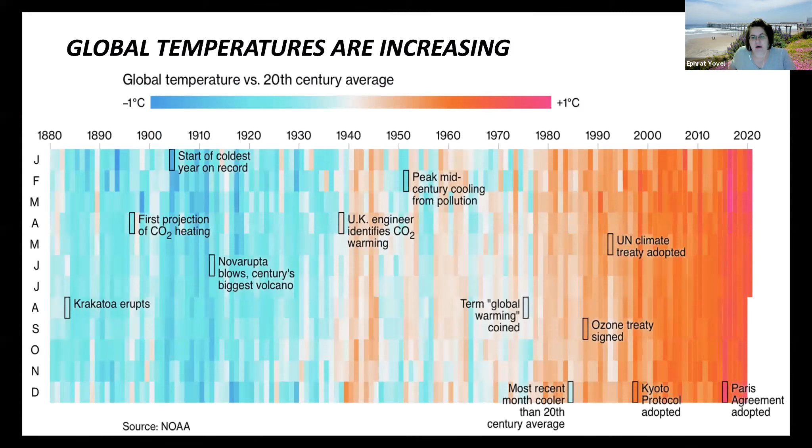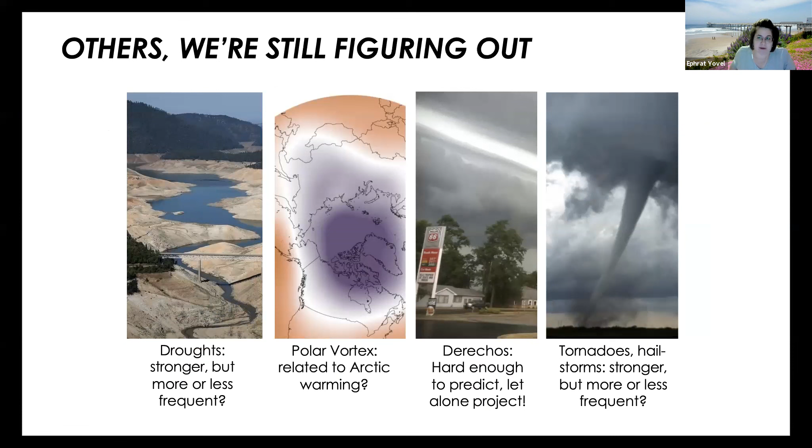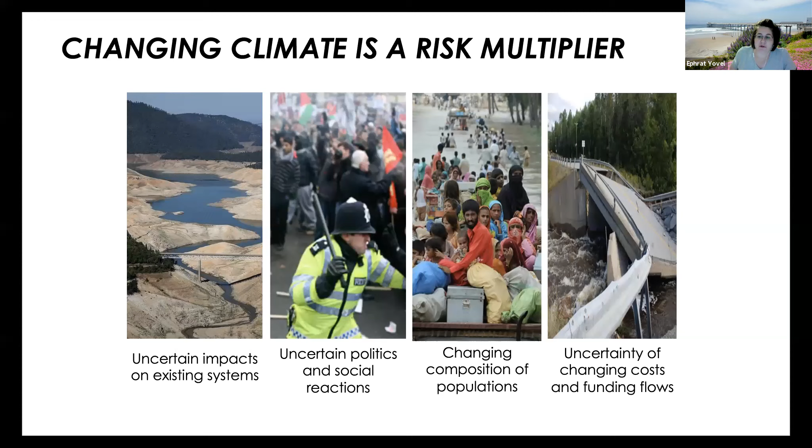So, hello again everybody. I want to speak about some aspects of infrastructure adaptation in general, not just transportation, because we will have quite a few speakers about transportation. I try to focus on those aspects that are shared across all public works sectors, including transportation. I'm not going to speak a lot about climate risk and vulnerability analysis, though I will mention them, of course, because they're an important tool in learning how to adapt. We had separate and multiple discussions about those, so I don't want to bore those people who have participated in previous more focused discussions.

Okay, I'll very quickly start with a few shared slides on the understanding of climate change. I don't know how many of you have participated in the previous discussion, so I apologize if there's a repetition.

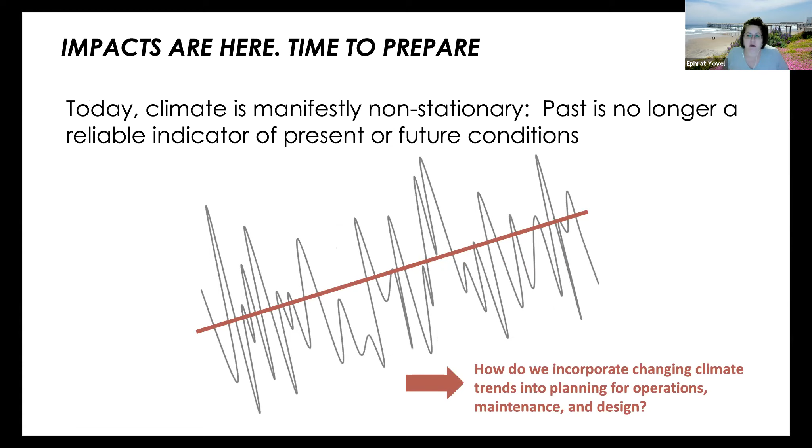So as you all know, we're living in a dramatically warming world. We have quite a few sets of climate impacts that, from a technical point, we're all comfortable and aware of the level and frequency and intensity of the impacts that are projected. There are quite a few climate extremes that are still being figured out or more refined. A better understanding is being developed. And of course, climate change is a tremendous risk multiplier from a social, natural resources, as well as funding aspect. The most important part to remember is that we cannot predict the future based on past events. The change is quite dramatic.

This slide, and probably these next two slides, are probably the most important ones for engineers - this understanding that we move from a stable historic trend to a non-stationary trend that is dramatically changed from what the past was.

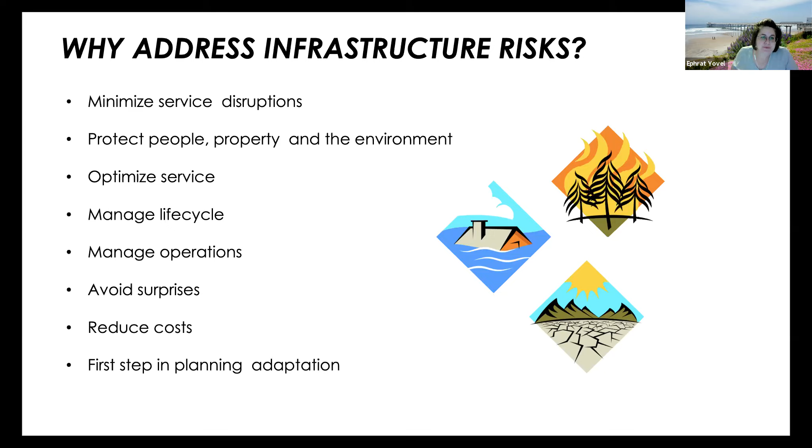The reason this is important is because many engineering professions rely on data parameter tables that set up standards and assessments, and they are relying on past information. The engineering profession in general develops infrastructure based on past experience, which sets the parameters. We're now moving into a very different world, which is a huge challenge. And lastly, we want to avoid the situation where we never have a green light to move forward and adapt and have a better future.

So, infrastructure and climate change. The range of services provided by infrastructure in general is tremendous: shelter, safety and security, aesthetics, heat, light and power, mobility, health and recreation, wealth creation, homes, buildings in general, transportation networks, energy networks, wastewater and stormwater networks, industrial structures, communications, landfills and waste-related structures, and of course culture and recreation. That's just to name a few.

We need to address risks to infrastructure, or climate-related risk, because we need to minimize service disruptions. That's one of the key aspects of services. We need to protect people as well as property. We need to optimize services to a changing climate. We need to better manage the life cycle of infrastructure assets that we build. We need to manage operations and hope to avoid surprises. Reducing costs is always a criteria for any agency that I'm aware of. And lastly, understanding the risks is a critical part of understanding adaptation planning.

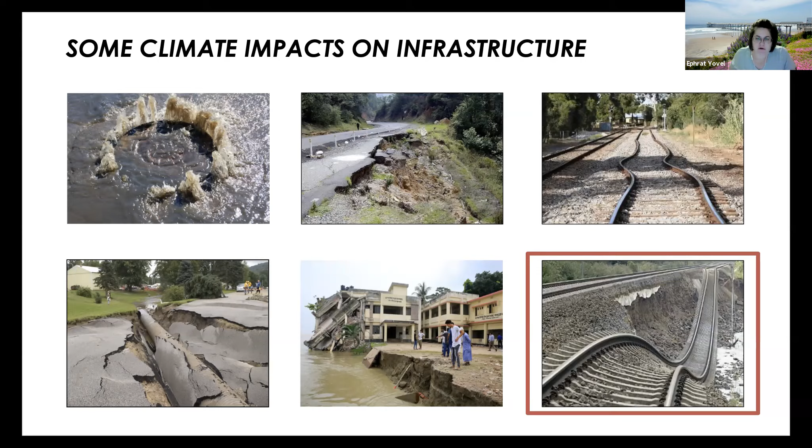Since Ukraine is considered a relatively cold country, I don't know how many of you are familiar with the concept of railway lines that get deformed from heat. This is something the UK has experienced, Canada has experienced, the northern parts of the US have experienced. Florida, for example, doesn't experience this because the standards there are already working towards very high heat levels. But in the northern US and Canada, where they have a lot more snow, and in Europe, in very snowy regions, you're starting to see deformation of railway lines, depending on when they were constructed and some of the standards.

The other thing you start seeing quite a lot, which is underappreciated, is collapsing of the substrate for railway design. This specific picture is from Canada, caused by the permafrost. The melting of the permafrost was affecting the structures, the foundations for structures, as well as roads and railways. Obviously permafrost itself is not an issue in Ukraine, but I do think the public works and transportation ministries need to start looking at the foundations of the infrastructure and how that is designed. That is also something really, really critical. You see that also obviously in the center with the pictures of the road collapse.

We're looking at bridges that are collapsing. We're looking at dams, drainage systems, all of which are changing due to a changing climate.

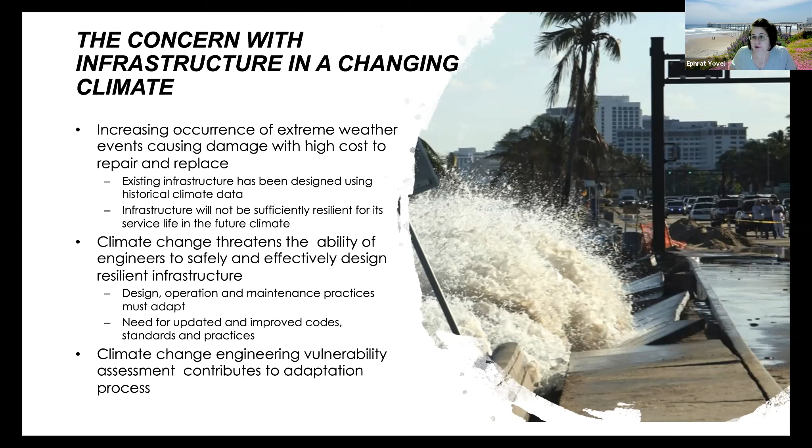Obviously, climate change threatens the ability to provide safe and effective infrastructure. If your facility, whether it's stormwater, drainage, roads, or structures, is not designed to accommodate a changing environment, then the facility itself is not as safe as it should be.

Climate change engineering vulnerability assessments, which we'll talk about in a bit more detail, but not much, is a really critical component of the design phase. It's also a very critical component of assessing risk and understanding some of the issues.

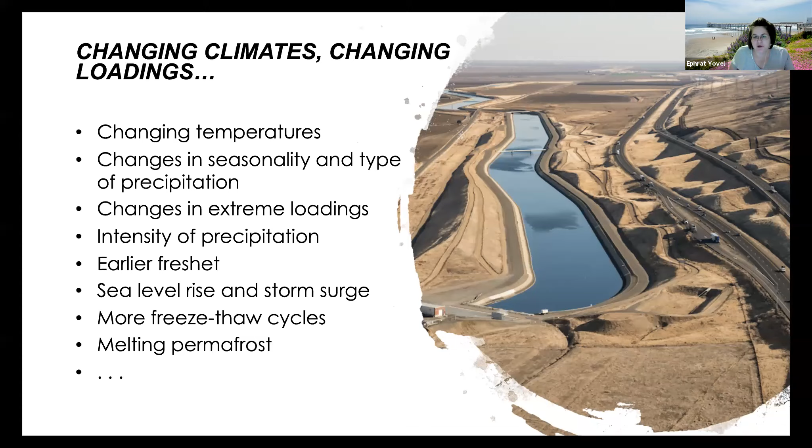For example, in South Florida, which experiences a lot of flooding now, municipalities cannot insure their service vehicles, whether it's waste trucks, ambulances, or police cars, because there are so many occurrences of flooding that insurance companies are claiming the cities have not prepared enough and have not rebuilt enough. They cannot insure a lot of their smaller assets, the vehicles, which means that in reality, the cost to replace them is actually much higher than projected in budgets and in municipal operating budgets, maintenance and operations.

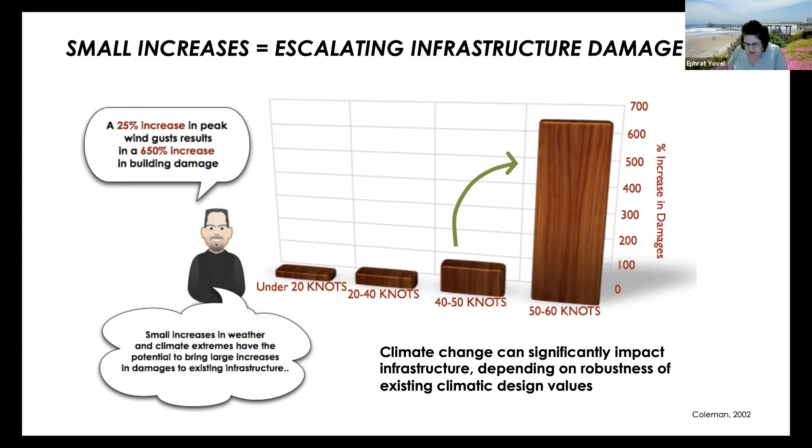One of the reasons climate is such a critical aspect for infrastructure in general is that it changes the load on the network, on the individual assets. And there's such a wide variety of challenges that the climate poses to the parameters we design with, that it really requires a strategic and consistent approach to changing things.

So, for example, if this is for wind - what we see in a lot of climate events and climate impacts is that once you reach a certain threshold, the impacts increase dramatically. This is for wind, from a survey of insurance costs for wind payments across the world, and you see that once you hit the 50 knot threshold, all of a sudden damages increase by 650%. So a 25% increase in wind strength is causing a 650% increase in damages.

So those thresholds are different for wind, different for water, different for heat. And we're seeing that what we would consider from an engineering perspective a small jump, from 50 knots to 60 knots, is not that big of a jump really. But in terms of damages, because it exceeds the capacities and loads of the design infrastructure, all of a sudden we're seeing tremendous jumps in damages.

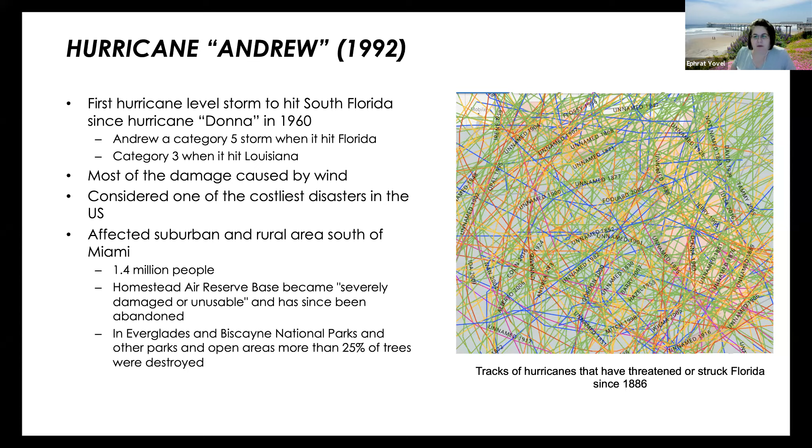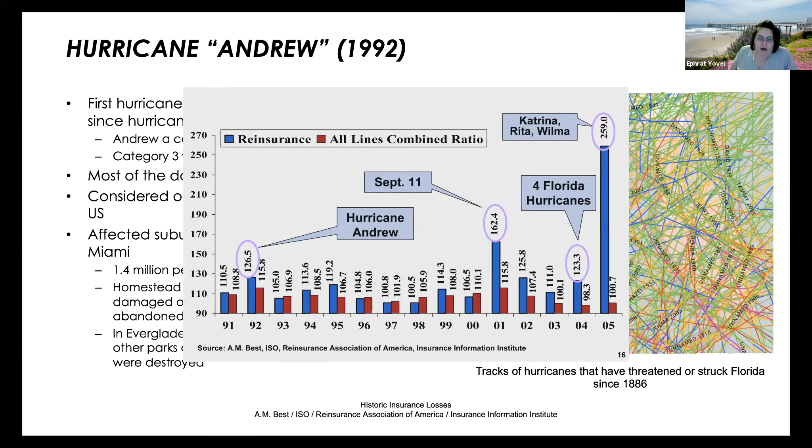For example, if the population of a city grows very fast, the infrastructure is not going to keep up. There are going to be a couple of years where roads are extremely busy, or the sewer system is a bit overloaded. What that does, by having this gap between the design capacity and the actual load, is actually cause failure of the assets - not the system, but the individual assets.

So small changes and understanding these thresholds are really, really important. On the other hand, I want to show an example where small changes can also make a very big difference in how assets respond. So I'll give you an example, also from Florida.

I don't know how many of you are familiar with hurricanes, but Florida experiences a lot of hurricanes. Hurricanes have 20 or 30-year cycles, where you have 20 or 25 years of very low exposure, and then 20 or 30 years of very high exposure, or at least that's been the historic trend. So Hurricane Andrew in 1992 hit Florida and was literally the first storm to hit Florida after a huge gap - a 30-year gap in hurricanes.

During that period, the population of Florida grew from 4 or 5 million to something like 12 or 15 million. So it created a huge amount of damage, which I'm not going to go into - I could talk about that for a good couple of hours. But at that time, in 1992, it was considered the most expensive disaster the US had experienced.

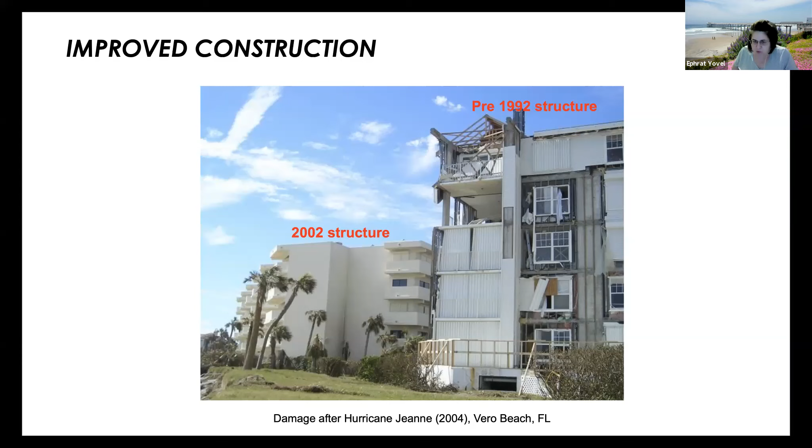One of the things Andrew did, because it came after 30 years of not experiencing hurricanes, is it actually generated quite a lot of changes to how construction and building is approached in Florida. It improved land use planning, restricted development in certain areas, and increased requirements for open space. The Florida building code is now updated every 5 years to adjust for climate impacts and new technology.

Every 5 years, we go through a review of the building standards for every single public asset and structure. Building costs in Florida are at least 15% higher than any other state, but there are improved construction techniques and quite a lot of non-structural mitigation aspects. The reason I want to show you this list is because even though these were implemented for disaster reasons, they could all be considered adaptation of various sectors to a natural disaster and to changing climate.

One of the things they did is change the design code, the engineering requirements. We have here an experience from a hurricane, damage from a hurricane after 2004. In 2004, there were 4 very strong hurricanes that hit within a 3-week period, so there was quite a lot of damage to structures.

You can see in the foreground a structure built before 1992, and a structure built in 2002, where the difference in the damage is quite significant. When you think about it, what was actually the difference is they changed 2 things in the roofing: the toe nailing, which is a type of connection for the nails, and the metal anchors which connect the trusses to the beams.

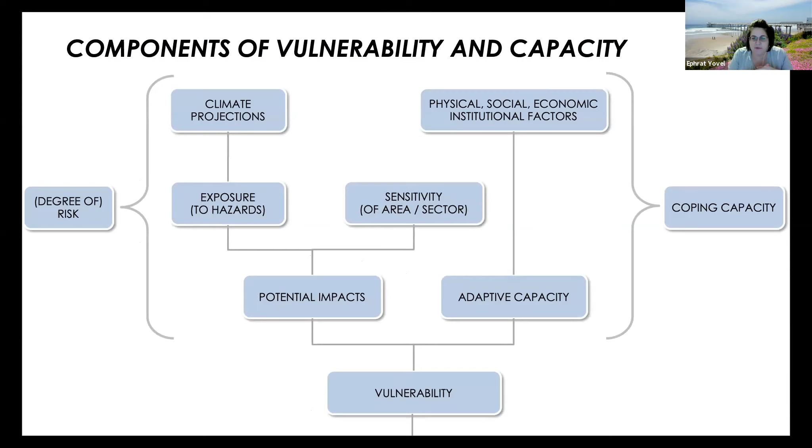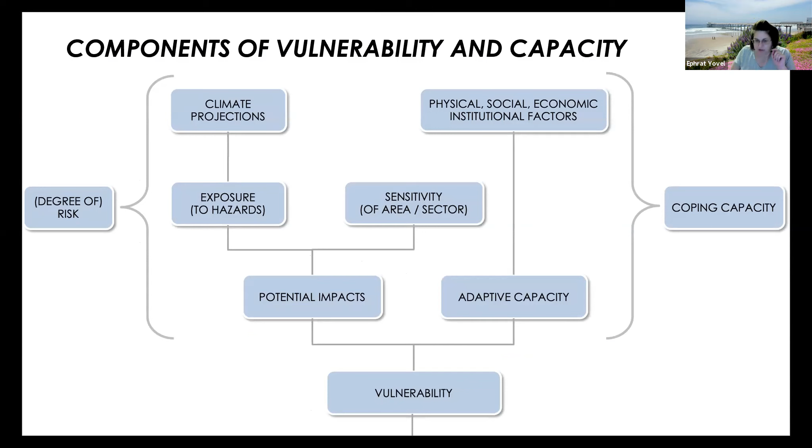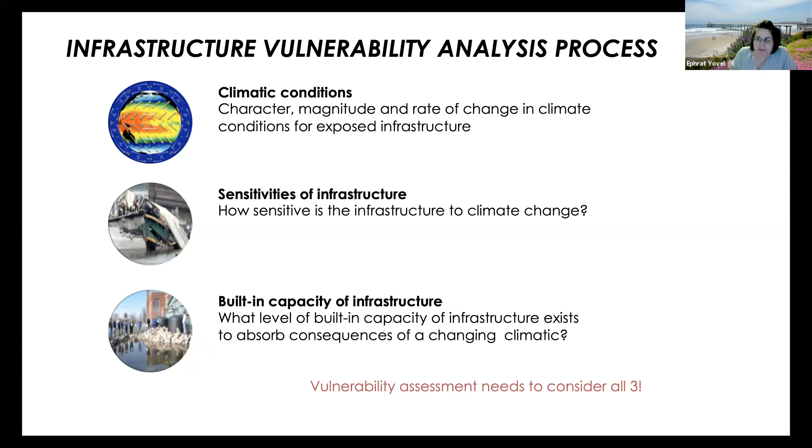So while yes, there's tremendous damage that can be caused when we cross climate thresholds and get these huge jumps in impacts, we can also make a lot of changes through better understanding of the risks facing structures, assets, and systems, and how to reduce them. Because we have a better understanding of the risks and vulnerabilities, we can be very targeted in our approach. Changing the types of nails you use for a roof is not a big cost for a builder, but it's a tremendous savings and reduction in vulnerability for the structure, as well as for the people who use it.

Infrastructure vulnerability analysis, just like every other type of vulnerability analysis, relies on understanding exposure, sensitivity, and adaptive capacity. The additional aspect that really needs to be considered is the technical parameters, because any asset has a set of technical parameters that define its capacities. So when dealing with asset vulnerability analysis, whether it's a structure, a road, a wastewater facility, or anything considered public works or structures, you also need to consider the technical parameters of that individual asset.

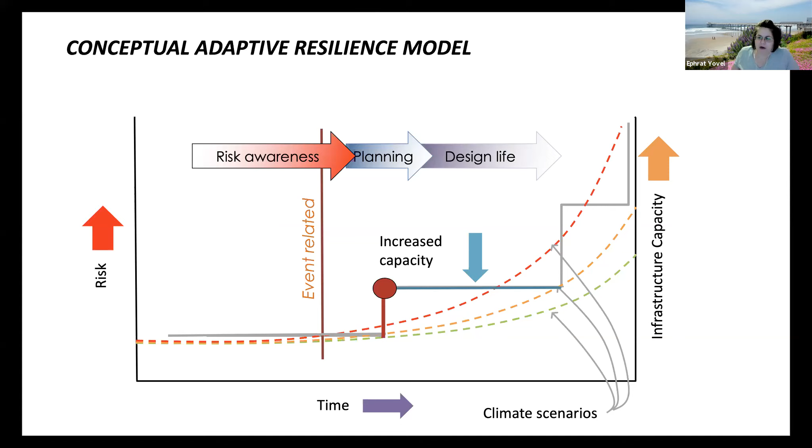Oh, it's okay. We hear you. You're keeping up with me. Okay, good.

So basically, we need to start thinking more about system resilience and asset resilience, which is the ability to withstand a much wider variety of climate impacts. From a technical point of view, this means that we need to have a wider set of design parameters that any asset is working for.

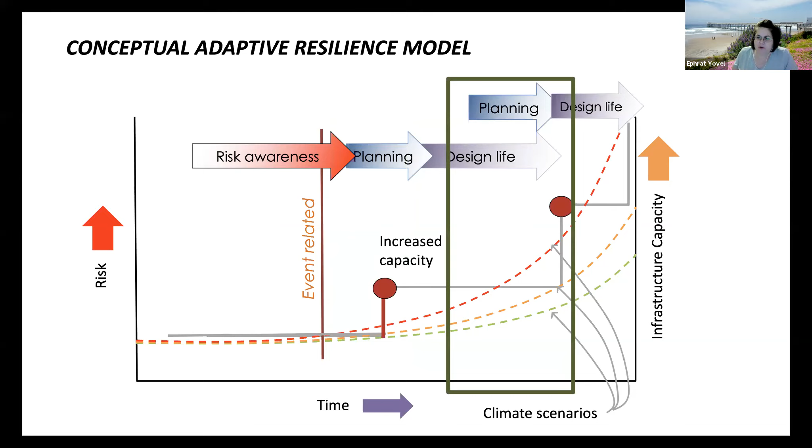Why is this important? If we think of a matrix of risk and infrastructure capacity and time in a context of some climate scenarios, some good, some worse, we start with where the blue line reflects where we stand with our current infrastructure.

As soon as we have a risk event, there's an increased awareness of potential risks in an asset. But it takes time to adjust the asset, not only in terms of planning, but also construction, because all public works assets have a very long planning and design life compared to some smaller adaptations. So what we see is big jumps in increased capacity before we stabilize at a new level of capacity.

And we repeat these cycles for all infrastructure assets. So basically that means we need to understand that transition from understanding the risk to incorporating that into the planning period of all infrastructure assets.

That's a very intensive awareness and technical understanding that has to jump up very quickly in order to be included in future plans. And then we also need to understand this transition towards the end of the life of an asset, of how quickly the new parameters need to be integrated, verified and validated so that we don't face collapse of structures.

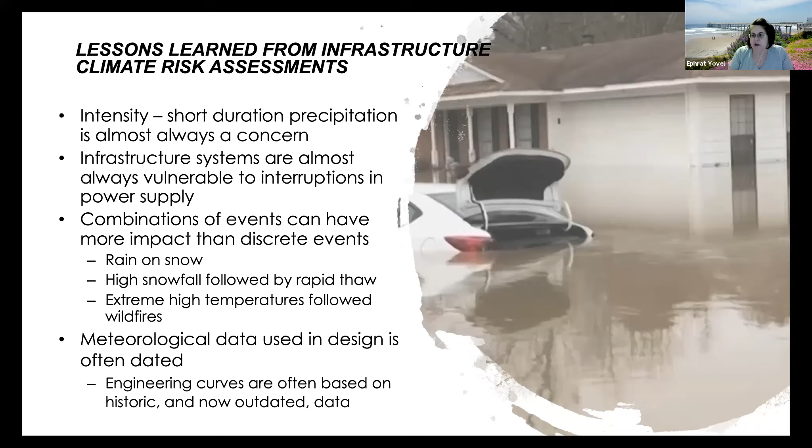I would say about 90% of infrastructure assets are vulnerable to gaps in the power system because of energy outages. That is a huge issue, especially as we rely more on optimized networks to balance the network, to optimize use and to monitor what is going on.

Combinations of events tend to have more severe impacts than individual events. And most importantly, the engineering curves that we use for design are severely outdated around the world. This is probably the biggest gap that exists around the world in terms of adapting quickly.

As I said in the beginning, engineers rely on these curves to design, and very few engineers are willing to develop a new set of curves without peer review and without looking at what is happening around the world. There's a lot of differences between different countries.

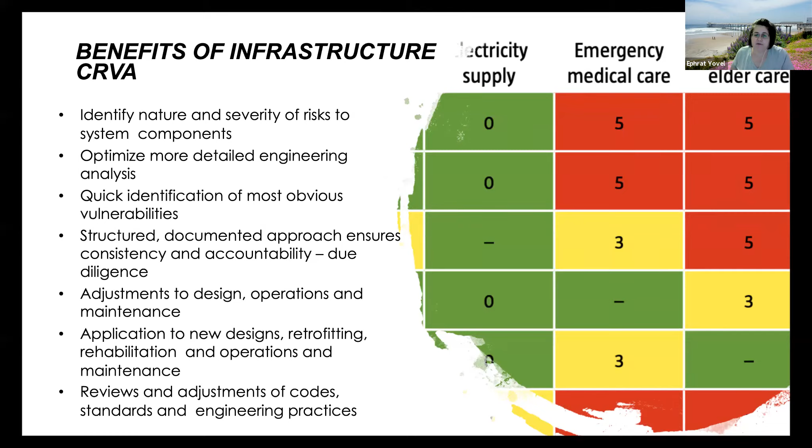For example, the US has two sets, one for the southern US and one for the northern US, because of the differences in temperatures. But Europe has one set. So even though on asphalt, for example, Germany goes up to 50 degrees, the European code actually doesn't go up to 50 degrees. So if you're using the European code as opposed to the German code, how do you balance that, and how risk averse are you?

We should be pushing our engineers in their original design thinking to go up to higher extremes, because in the end that is cheaper and more cost effective than having to fix things further down the road.

Multidisciplinary teams, I don't think we need to talk about, but that's really critical. Engineers tend to have very siloed understanding, and having wider teams working in the design phase saves a lot of time. Obviously, for climate projections, you need to have good data.

You need to make sure your baseline data is accurate, and monitoring and maintaining it. You'd be surprised at how many systems are not really good at monitoring and maintaining not only weather events, but also the impacts on infrastructure. So asset management becomes really critical.

The key aspects here are climate risk vulnerability analysis, identifying the nature, optimizing design, quick identification of vulnerabilities, a very structured approach to how you do the analysis, adjustments to the design, planning, and operations, application of new designs, and adjustment of codes and standards.

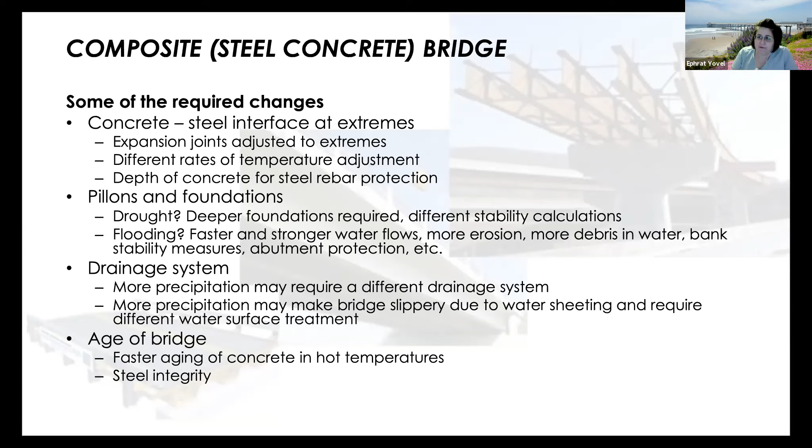They were built to the highest extreme of SNiP. And I said, that's great, except for the last 5 years you have already experienced temperatures and rainfall exceeding the design parameters, the very extreme parameters of SNiP that was designed in 1960 or 1970. That doesn't mean SNiP doesn't have an extreme weather section - it does, except it was never used in bridge design.

So all those old structures need to be looked at. We had this very long discussion about this. Now, Ukraine obviously doesn't have the terrain that Georgia has, but that doesn't mean you don't have bridges. So all I'm saying is basically, we have a lot more weak points in a lot of infrastructure than we realize, number one.

Number two, the solutions to a lot of these issues are known. If you sit down any engineer and say we are going to have twice as much rain on the bridge that needs to be drained off, that's not a difficult solution. Technically, it's a very easy solution. The difficult part is getting the engineer to accept that transition to a higher range of water flow or higher range of temperatures. The technical capacity, the technical design options are very easy. They're there. They're known for a very long time. The difficult part is getting the engineers to start using them in structure design and to start thinking of a more systemic approach to these things.

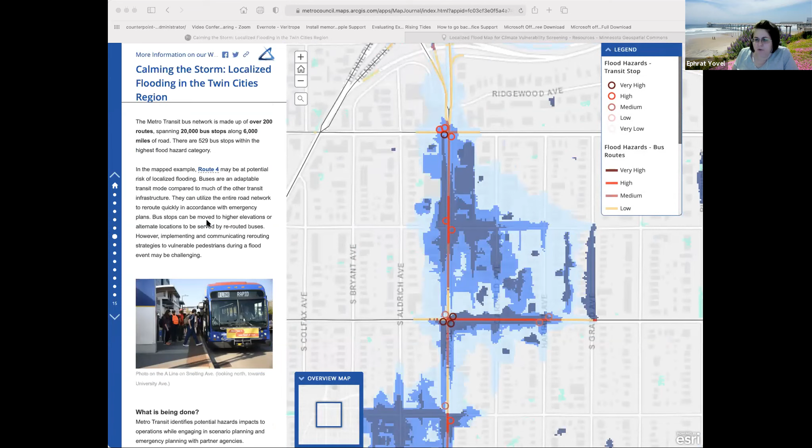I want to show you, if you'll allow me, some of the interdependencies we're talking about and why this is so important. So if you recall, from a couple of sessions ago, we talked about the vulnerability analysis that I'd done in Minnesota. I'm not going to bore you with that.

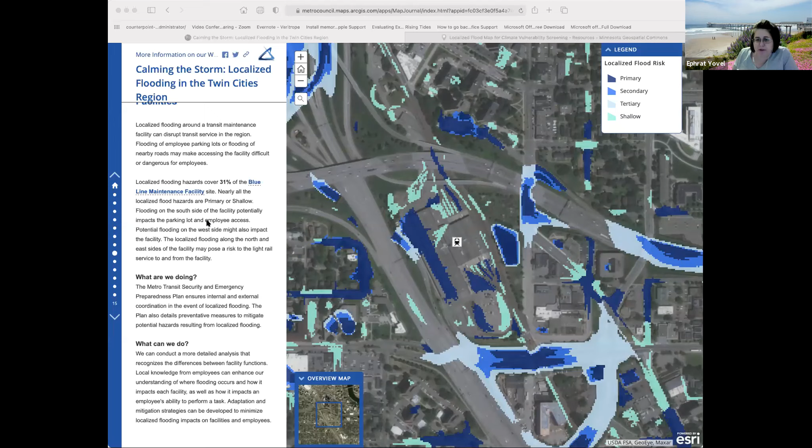So after we did the vulnerability assessment, we mapped this out for the whole city, not just the neighborhoods. And we looked at that in the context of a series of assets. This is for flooding. We don't need to go into the details right now, but just to show you, if we're looking at highways and transport, by having this online, all the agencies can see the data, right? They have better access than we have here in the story map. But you can see...

Here we see the exact segments of the highway that are at risk, so that the transportation, the highway division can actually look at which areas flood more frequently and are at higher risk, and can start adjusting their budgets and maintenance schedules to adjust for that. But also they can start adjusting for planning for replacements going forward.

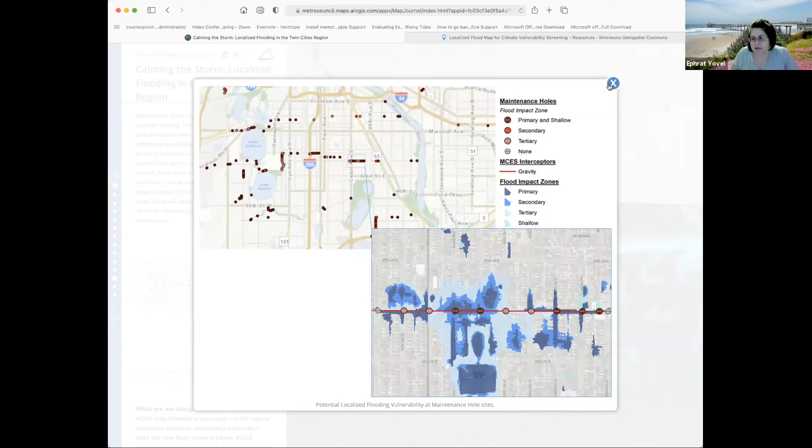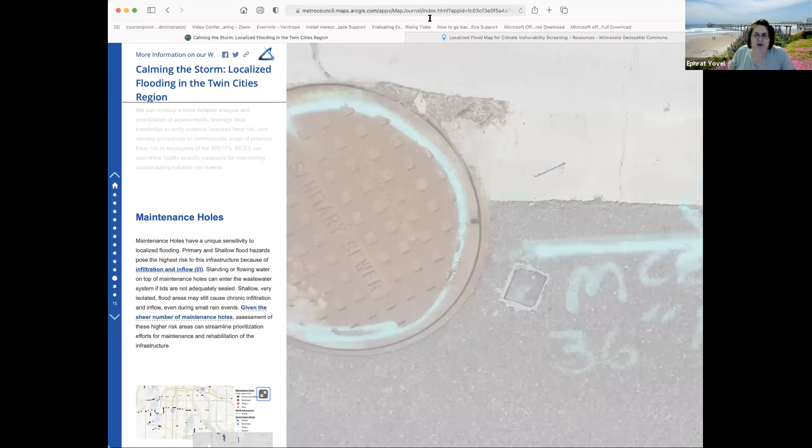We did this also for transit, the commuter transit stations and commuter transit spots, the bus transit areas, which ones are at risk and which ones aren't, the facilities, including the maintenance facilities, because if we don't have access to the depots to fix areas, we won't be able to. Wastewater treatment plants, which ones, and the access points.

Access is a pet peeve of mine. I think insufficient attention is paid to access to facilities, and they tend to get isolated. We see this a lot with hospitals especially. And I mentioned this briefly in our session on healthcare. Maintaining access to the facility is probably one of the highest priorities you have, because if you can't maintain access to the facility, you're never going to be able to fix the problems once there's an event.

Hospitals tend not to be considered priority access areas in the transportation design systems, for flooding events and access in general, even in heat events. And that needs to be looked at a lot more seriously as to how you maintain a high level of access to critical facilities.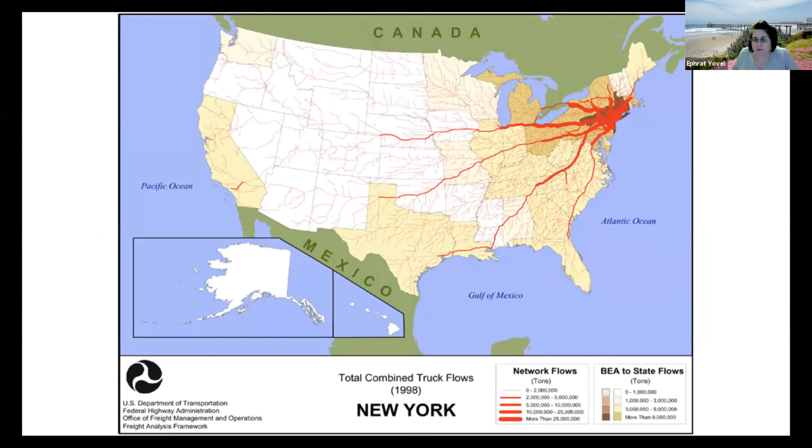Maintenance holes, we did an assessment of just about every single maintenance hole and which ones are flooding and which ones are not, so that we can adjust the maintenance schedules for the city here of Minneapolis.

Okay, this goes into some of the other mitigation measures, but I wanted to show you this because you can see how one good vulnerability assessment that is done correctly can help you address a lot of the interdependencies that exist between assets, even some that don't seem to be very obvious or very critical at the immediate point. And that's sort of me getting off my high horse of vulnerability assessments right now. But...

The point I'm really trying to make is the need to think both nationally for the system context, but also locally, to have a much better understanding of the context that the system operates in, for all systems. So I want to give you another example.

If you were asked today, most people who don't know the US and were asked which would be the most important port in the country for delivery of incoming goods, most people would say New York. Some would say Los Angeles. Very few would say Texas. And virtually no one would say Louisiana or New Orleans.

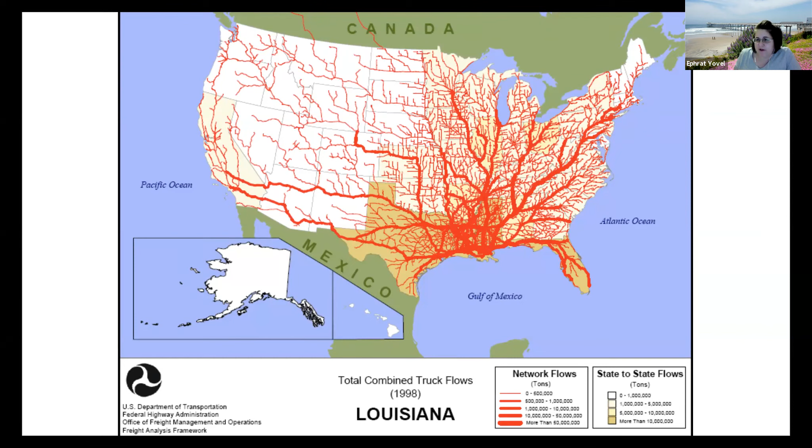Well, this is not quite New Orleans, this is between New Orleans and Biloxi. This is the reason Katrina was so expensive, because once Katrina hit, the damage to New Orleans itself comparatively was not much. That's not to detract from the damage there, but the social damage was much bigger than the structural damage, comparatively speaking. The damage to the economic system in the US, because of the dependency on New Orleans as an incoming port for transportation of goods and fuel...

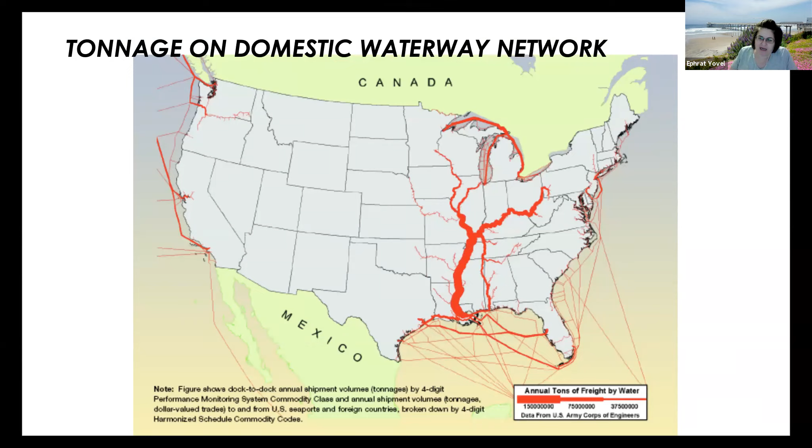was the reason the economy suffered so badly after Katrina. The fact that the US Army Corps of Engineers, responsible for the levees, drainage and water systems, did not understand the high level of dependence of the national economy on New Orleans as a port prior to Katrina, meant they didn't prioritize work needed there compared to other cities prioritized for other reasons. That's something all prioritization processes need to take into account—not only immediate local impacts, but also wider national and regional impacts.

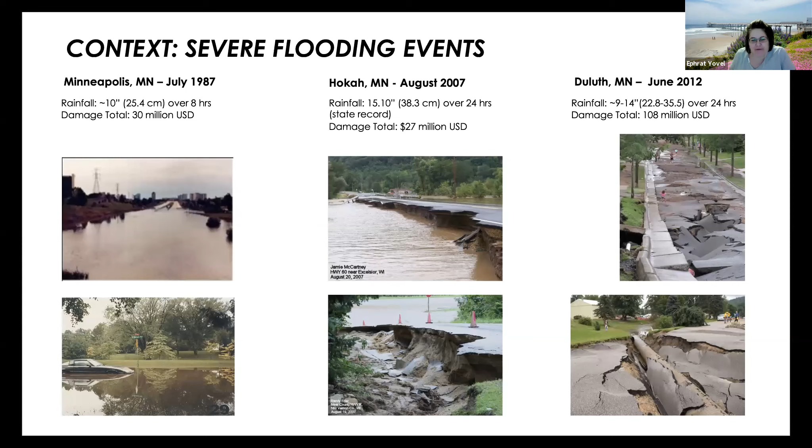If we look at combined truck flows, meaning not just fuel but also trucks, you see how important Louisiana was prior to 2005 to the transportation and delivery network in the US. It was also the primary center for delivery by waterways. So once the rivers flooded because of the hurricane, you couldn't use the waterway system to transport goods either, not just the roads but also the waterways. I just wanted to bring this up to show how critical it is to understand where your real vulnerability is, and where your weak points are. Adaptation is about understanding where your weak points are and fixing them so the system can retain its service capacity.

I want to go into a couple of case studies now. This is the assessment we did, which I mentioned earlier.

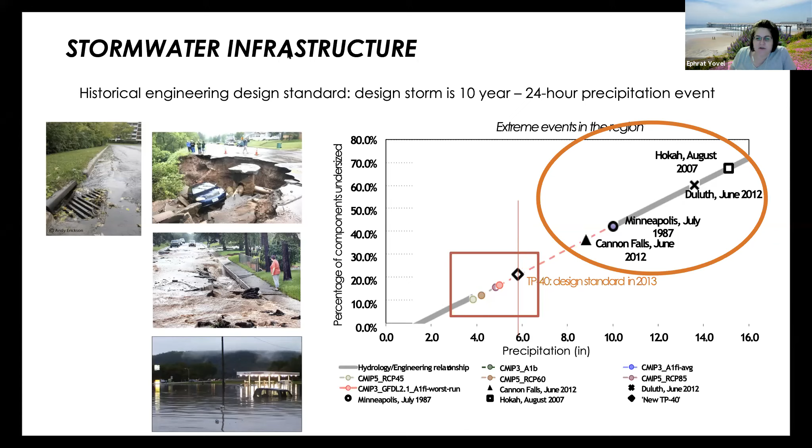How many people on the webinar have already seen this? Can you give me a quick number so I don't repeat it if everybody's seen this? I think we have new participants, so anyhow, we'd like to go over this once more.

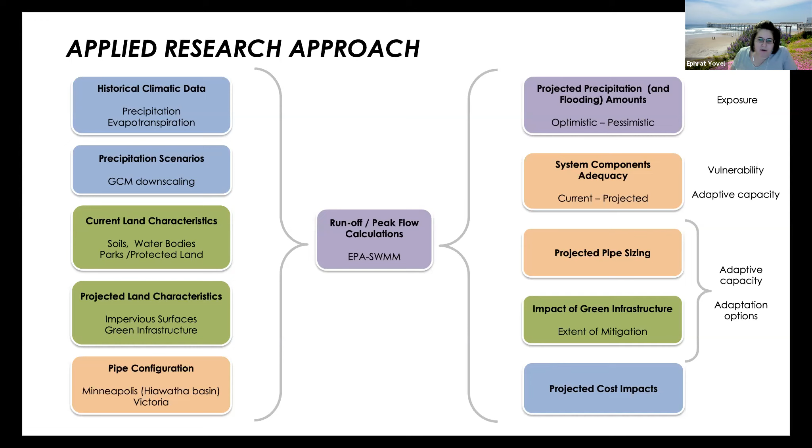So, we started with an assessment of vulnerability of the stormwater system. Minnesota had experienced quite a few flooding events that caused a lot of damage. Minnesota is in an area facing a significant increase in the amount of water and precipitation it's going to see. The watershed itself, this area of Minnesota, is called the 10,000 lakes—it has a lot of small lakes and ponds, so it's obviously very flat.

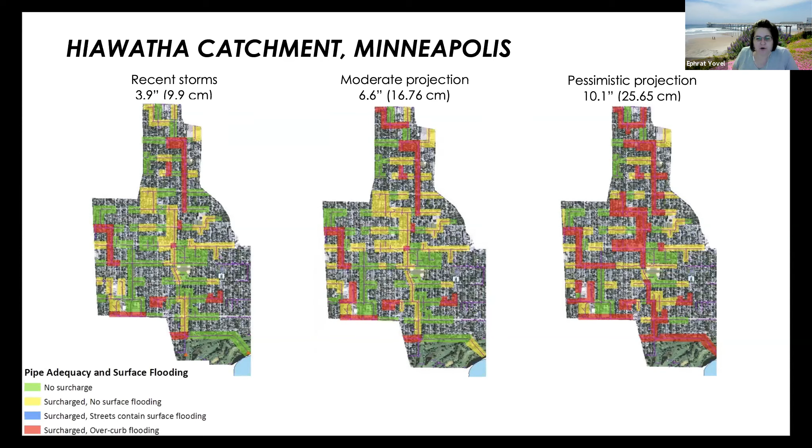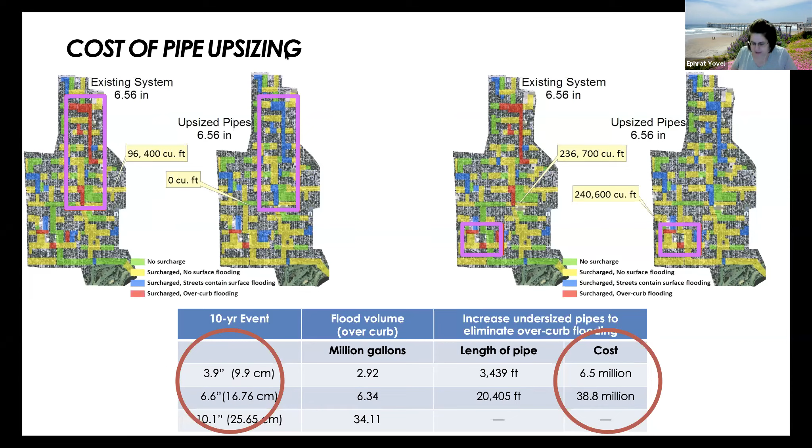So we built a vulnerability model based on EPA SWMM as well as climate projections, and identified what the new design storm capacities need to be. At the best level, we had to increase the system capacity by 10%. At the most pessimistic level, we had to increase it by 157%.

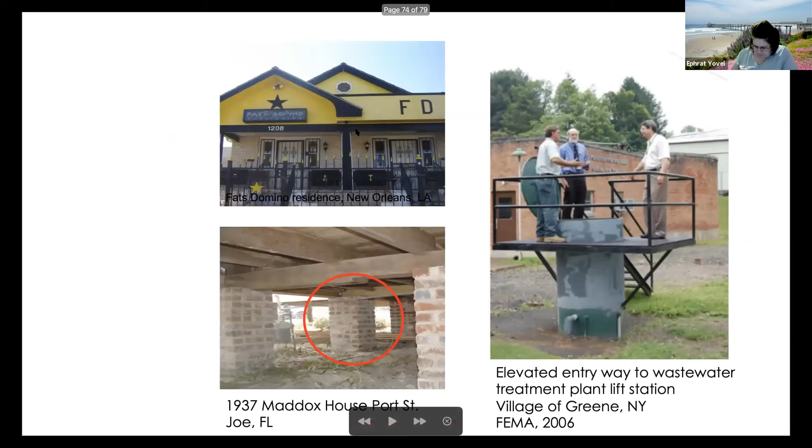Then we ran the models on the drainage system, and you can see there are quite significant parts with a lot of surcharge. Not only is the drainage insufficient, it overfloods and goes above the sidewalk curbs. What you see is a significant jump, even though if you look on the left-hand side here, we're not really jumping by a lot in terms of the amount of precipitation—only 3 additional inches, which is not a huge amount.

But the cost jumps quite significantly—we went from almost 7 million to almost 40 million. That's a huge jump in cost that literally panicked the municipal leaders here, because they were like, we're not going to be able to afford it, we're going to have to raise taxes, we're not going to get the money to do this—how do we fix this?

Well, one of the things the team pointed out to them was that they were looking at the wrong number. The number is not the cost or the length of pipe that needs to be replaced. The number is... sorry, oops.

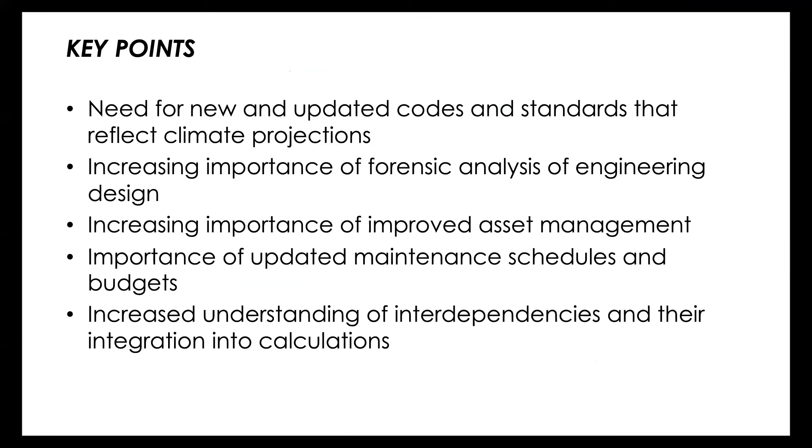Now, I don't know what your maintenance budgets look like in Ukraine, but I know that in every single country I've ever worked in, nobody has done 100% of the maintenance they're supposed to do in a single year. So the less maintenance you do, the more your gap grows. That means every 3% increase, you're never catching up. You'll never be able to address the changing climate because you've never caught up with historic maintenance. And if your systems are not maintained properly, they're never going to perform at 100% capacity.

So every year you don't do your maintenance budgets properly, and you skip maintenance for whatever reason, it means you're reducing that much capacity from your system already, and then you add climate impacts on top of that. That means you're reducing your capacity by that much more, and this is why systems start collapsing. We need to start addressing that much more concretely in budgets.

And lastly, understanding the interdependencies between systems, and the importance of making sure road transport to healthcare facilities stays at 100%, that wastewater systems and every single system is optimized. We all need to understand that a power outage will not only cause a power outage, but it could also cause a problem with a sewage plant, with streetlights, and God knows what else, right? Having every sector understand the interdependencies much better will help adjust the system on how we move forward.

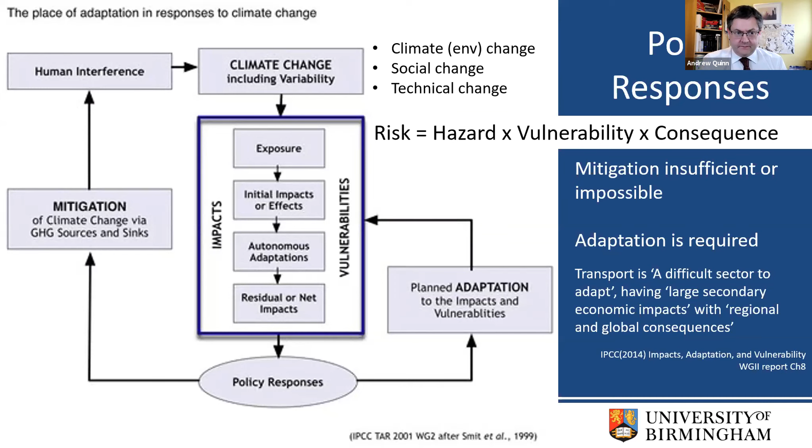So it's important to think about how we deal with adaptation in these kinds of situations. This is a figure taken from the IPCC report, the Intergovernmental Panel on Climate Change, and it highlights the difference between mitigation, the reduction of greenhouse gas emissions, and adaptation, particularly of engineering structures, infrastructure, and transport, where we need to change structures and systems to make them resilient to the changing climate. We can only mitigate, only reduce the changes to a certain degree. We also have to adapt. These two elements must go hand in hand.

Transport has been identified many times as a particularly difficult sector to adapt. It has very large economic impacts, and regional and global consequences because of supply chains and the increasing length and complexity of the things we have to transport.

So it's important that we consider adaptation, and the various elements of risk that we are trying to change when doing adaptation. In my risk equation, I think about the hazard, which is the changing climate and the meteorological variables concerned, the vulnerability of the structures and elements in place for the transport system, and also the consequences of any failure of the transport system.

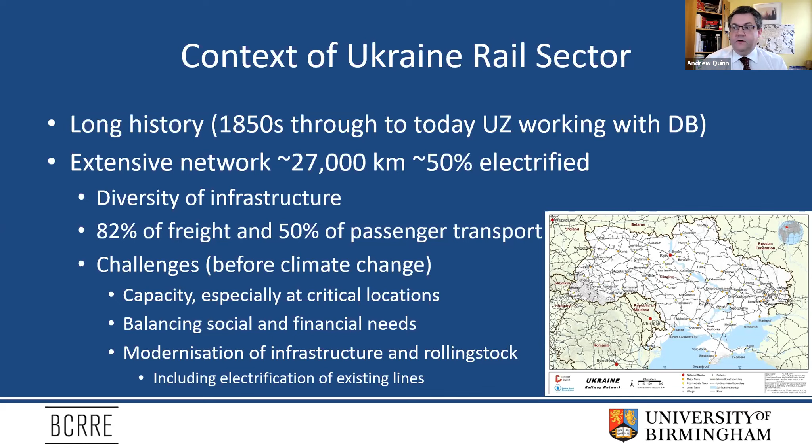It's really important to start thinking about this in the context of the Ukrainian railway sector. Ukrainian railways, just like UK railways and many others around the world, have a very long history. It dates back to the early days of railways in the 1850s and has been continually changing throughout history. Even now, it's beginning to work with DB, the German rail group, to try and develop its practices and infrastructure. So it's a continuous changing process, but a lot of the infrastructure underlying the transport system has been there for a very long time.

So we have this mixture of old and new. It's a very extensive network, 22, 25, 27 thousand kilometers of track, depending on exactly how you measure it. And as one of the previous speakers mentioned, around half of that has been electrified to date. So we have this very important infrastructure, very embedded within the communities it serves. And it has a number of challenges before we even start to think about climate change: capacity issues, the need to develop a financial model supporting both social and economic sustainability of the network, and challenges of infrastructure and rolling stock modernization.

So we need to put all of these changes into the model in order to be able to cope with climate change at the same time as dealing with all of these different infrastructure challenges.

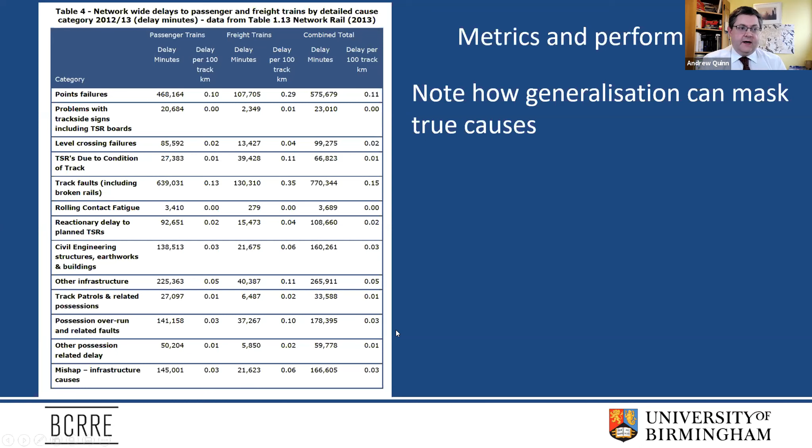So these are all alternative approaches to resilience which we need to consider in our planning. And they can make a difference to the level of service that we are able to provide on the railway network in the event of disruption.

So we built guidebooks for different sectors of transport, including the rail network, looking at different types of extreme weather. So that is available for you to look at.

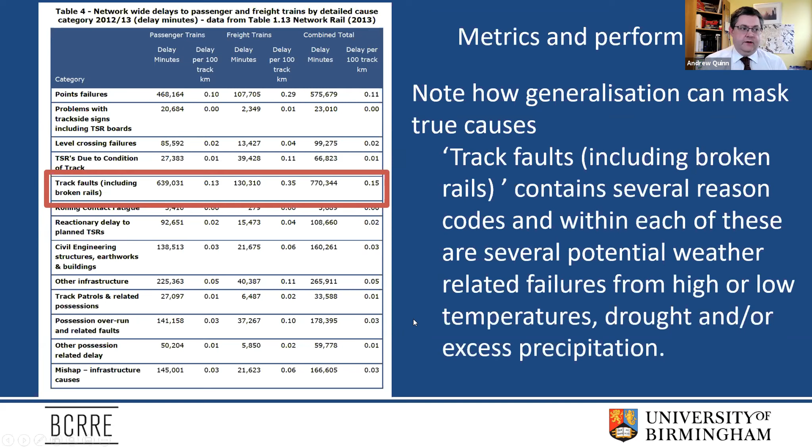And we also conduct studies looking at the data from the railway and correlating things like faults on the railway with the weather conditions that were happening at the time. And you can begin to see a pattern where particular types of faults with particular types of equipment are very dependent on particular weather conditions.

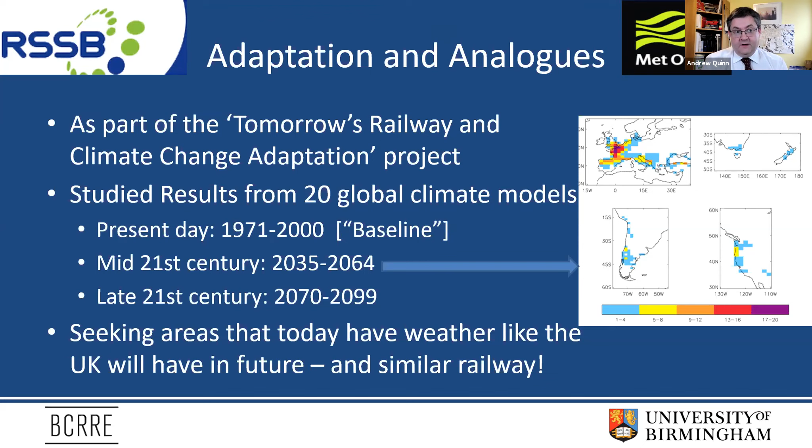That begins to give you an early warning of what may be in store when the climate changes, so you can see if you're more likely to have high temperatures, and therefore more likely to have certain sorts of equipment failing. You can then put in place a plan to improve the specification of that equipment when it's replaced, or develop some protective approach to avoid its failure from high temperatures.

It's important to have good data, as the previous speaker mentioned, and I'd echo that. In some cases, railway data can be very general. Track faults are one type of failure, but that type of failure can occur for a number of different reasons, depending on different weather variables. So it's important to have depth of data to understand the different causes of a particular failure. That's something we are working on with the Network Rail in the UK.

This slide is an example of work we have done to identify what we call analogues - other places around the world that have similar weather to what we might expect in the UK in the future, so we can begin to look at how they are coping with their current conditions. In that way, we begin to get people to work together, which is a very important part of adaptation planning.

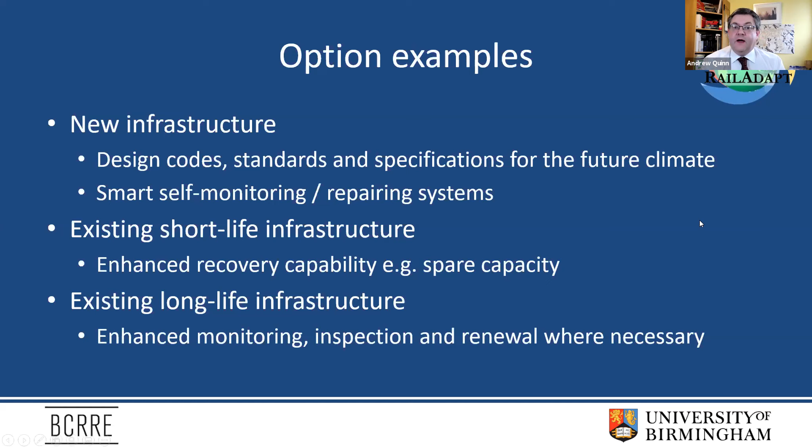Then it can put that into an adaptation plan, which can generate options for improving resilience in different places by different methods. It can put those plans into action and review the outcomes, such that the next round of planning can be informed by what has already happened. All of these steps within this plan link to other organizations and sources of information, so it's important this is a collaborative effort through European programs, local expertise, and all the different sources of knowledge available.

Some of the kinds of options one can be thinking about relate to new infrastructure and improving design codes and specifications for the future. It can also involve monitoring systems which give early warning of problems and failures, and utilize the rail network's ability to do management and maintenance by improving capacity and recovery times for equipment and infrastructure failures.

And finally, for very long life infrastructure, we can put in place monitoring which gives us good information about the condition of the infrastructure, highlighting weaknesses where interventions are necessary, and helping plan renewals of the railway system.

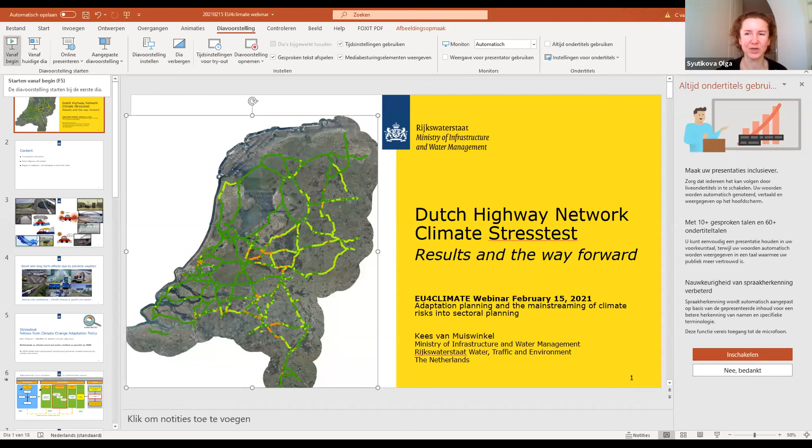Thank you Andrew very much. I had also some questions about your presentation, but maybe I would put them aside until the end of the discussion, because they're very deep questions about the indicators of failure and our possibility to put them together and analyze everything, so we may need more instructions on this point. Will you stay with us? Yes, I will. Okay, so we'll have more questions at the end of the discussion.

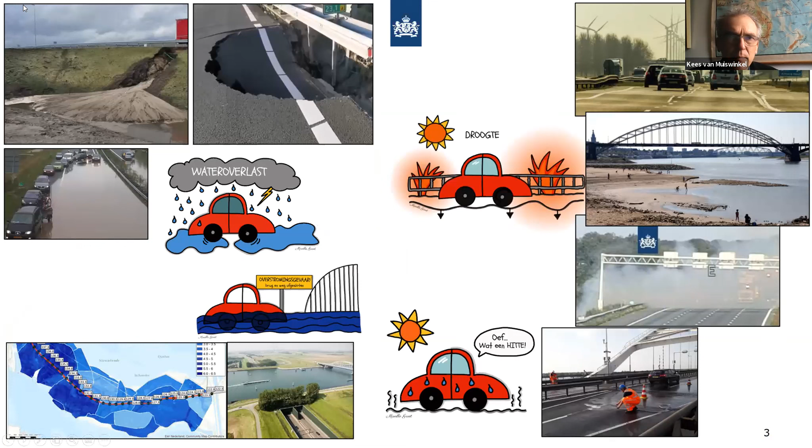So, I'll try to share my screen. Can you see it? Yes, it's okay now. Yes, so let's see. Oops, there's, yeah. Well, thank you very much, very interesting content. Before this I haven't been able to follow everything, and I hope the connection is okay because sometimes it fell away for me.

So, I'm going to tell you about the climate stress test of our Dutch highway system. I work for Rijkswaterstaat, which builds, maintains and manages the highways in the Netherlands, but also the waterways and water systems. So it's all about water quantity, water quality, shipping, and obviously the roads.

I'll give you a short introduction, tell you about the stresses on the highway, and tell you what we have done so far with the results of the stress test.

Here you can see some effects of climate change on our highway system. We look at the effects of extreme rainfall, which can cause erosion, but also water on the road obstructing traffic. Drought—we've experienced long periods of drought the last few years—can lead to more soil subsidence. We have very soft soils in the Netherlands, susceptible to subsidence, and drought can increase this, causing damage. Drought can also lead to less water in the rivers, meaning less transport by water and more on the road. It can also lead to more fires along the road.

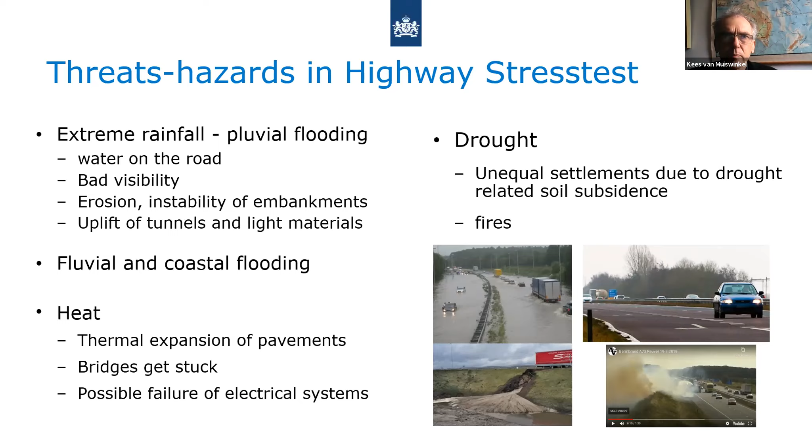Right at the moment we're in the process of having dialogue. We talk with stakeholders about the results of the stress test, and also what measures do we want, or need, to take. We started these dialogues last year and we're carrying on with that. Not only talking with our own stakeholders, but also regions who actually build and maintain the roads. We show them the results and talk with them about whether they recognize the vulnerabilities, and what sort of measures we should take.

We also talk with our ministry, since we manage the roads on their order, so we need to have discussions about what this would mean for extra costs, for example.

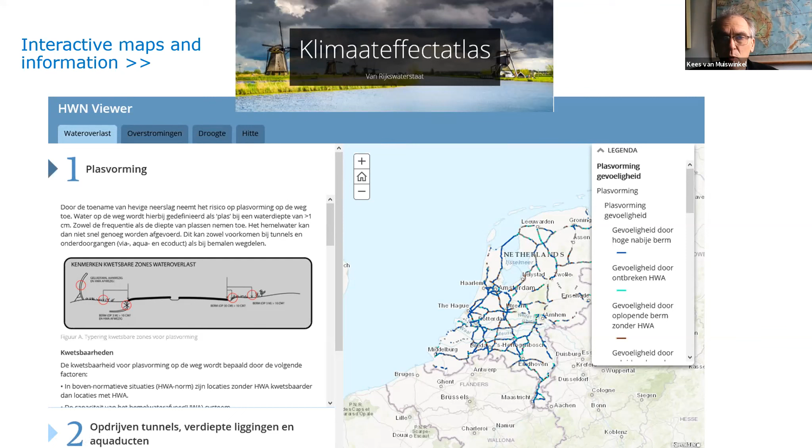We also talk with external stakeholders like water boards, municipalities, and provinces who deal with other roads. We look at whether we have common challenges and can work towards a common solution for climate change adaptation. In the end we're working towards an implementation plan, and we need to talk about ambition. We're actually right in the middle of this process at the moment.

In our stress test we looked at different vulnerabilities, as I mentioned. We look at the effects of extreme rainfall, droughts, flooding, and heat, among other aspects, to assess the vulnerability of our roads.

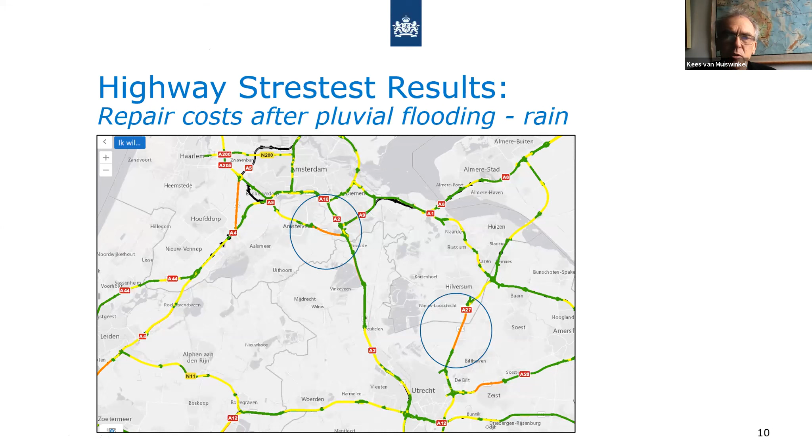With those results we built our so-called climate effect atlas. You can see it's in Dutch here, but basically it's the results of our stress test, made interactively available. So everyone who wants to know how roads are vulnerable in their region can zoom in and look at the different effects interactively.

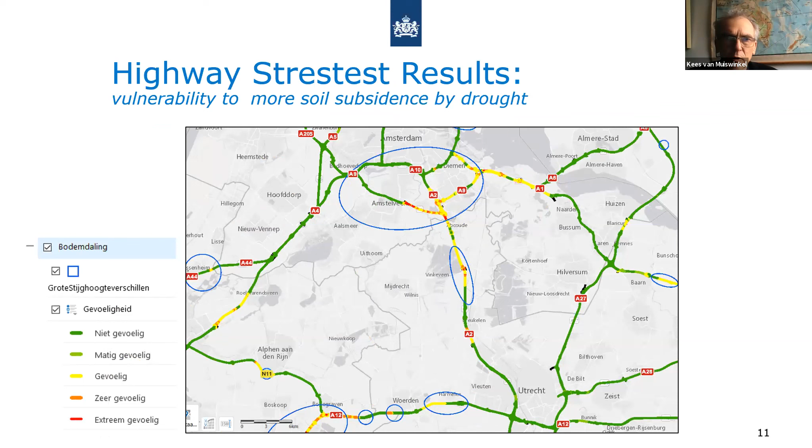That's a very nice tool, I can say. For example, our railroad company in the Netherlands, ProRail, has made the same sort of stress test interactively available, which is very helpful when you want to discuss what measures to take.

Next map, highways. Here you see a map showing our repair costs when we have pluvial flooding, which can differ across different stretches of road.

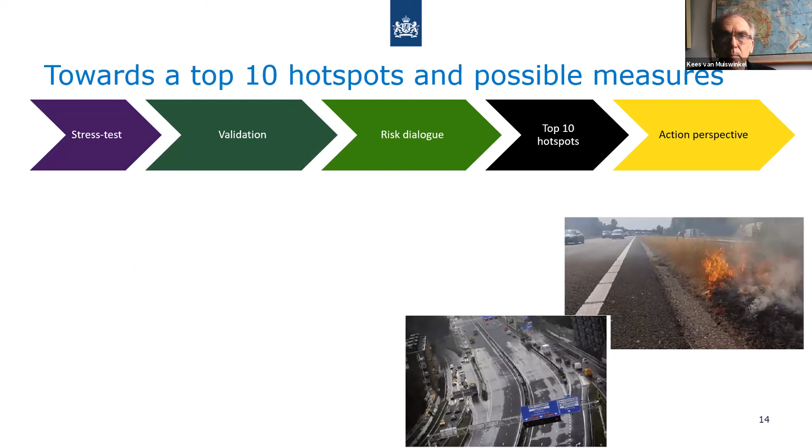Next slide, as I mentioned, soil subsidence. We have large parts of the country with a lot of peat, and soil subsidence has been happening for ages, but due to droughts it can increase. There you can see the map showing which stretches of road are vulnerable to that.

And with all these results we have, I've told you about the dialogues with stakeholders, and we work towards an action perspective and measures. So we offer, for example, we have also developed lists of possible measures to take for roads. For that we used the results of the CEDR project, ROADAPT, which has a list of possible measures, but we've done some more development on that as well.

And in these dialogues, for example regional dialogues, we work towards a top 10 of hotspots. So what are the most important climate risks? Which are the hotspots? Also we talk about what level of resilience we think is acceptable, which is not a very easy question to answer, I can tell you. Also, we talk about the measures.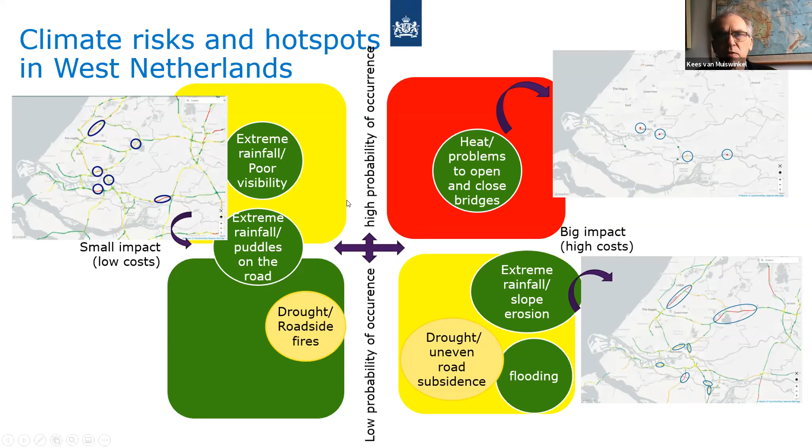And here you can see an example of the way we look at it. On the bottom, low probability of occurrence, on the top, high probability. Also small impact and large impact on the right, a big impact on the right. For example, some water on the road due to extreme rainfall - the probability is quite high, but the effect, because it will go away again, the water will run off, so the risk will not be that high. But for example, bridges that do not close - you can imagine if the bridge doesn't close anymore, you get a huge obstruction of traffic. So that's something these sort of diagrams show the importance of, where do we need to take measures.

But also we look at the low probability and high impact things like flooding. So the probability is very low due to the flood measures, the high water protection we have. But if it happens, the damage can be immense, as you can imagine. So that's something we are really keen on to deal with. This is just to show you the way we look at these risks.

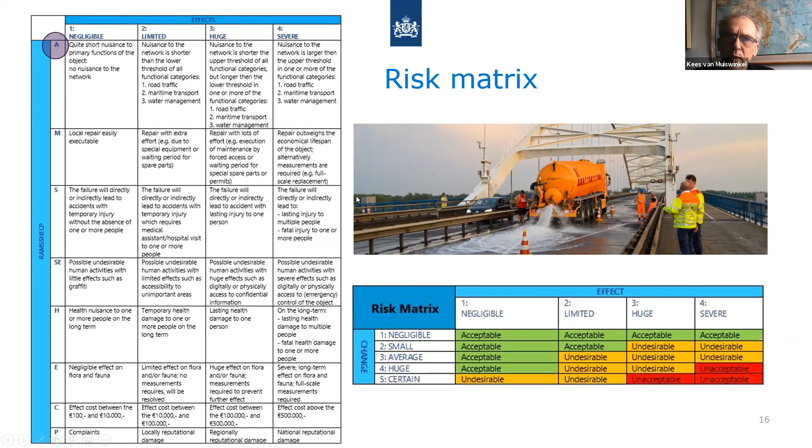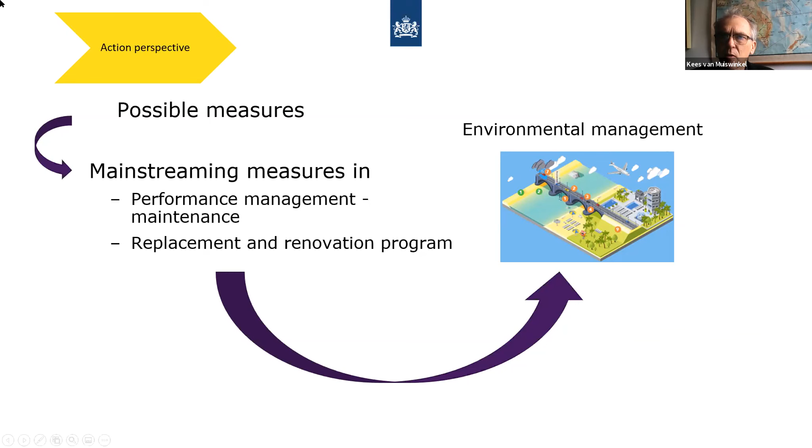For assessing risks, we have, for example, used the RAMSSHEEP model, which we also use for asset management. So R is reliability, A is availability, M is maintainability, but also, for example, effects for health or safety. And so we want to weigh all these effects. You can imagine that due to climate change, the probability of certain climate effects can increase, and also the risk can increase. So this sort of risk matrix can also help us see where we would want to take measures. And all these things are not done only on paper, but we also discuss with all sorts of experts, including asset management experts.

I think the great challenge at the moment is, it's not very complex to think about measures you can take for resilience, but the thing is, how far do you actually go when taking measures? Because you don't have unlimited budgets, and I'm sure it's the same in your country - you want to know what do you accept. For example, some water on the road which obstructs traffic for an hour is not a big problem, so you may accept that, but you don't want to accept it if the road is obstructed for weeks or even months. So that's the way we need to think about it.

I'm going to click through this. In the end, we work towards possible measures. We want to integrate that into our performance management system. Also, a lot of our infrastructure is from the 50s, 60s, or 70s, and lots of it needs to be replaced by now. So we need to think about, when we replace that, do we want to change design because of climate change? At the same time, we don't only want to look at our roads, but also the context of the environment and other stakes. So it's really important to take integral measures.

Well, that's what I would like to tell you about now, and we'll be happy to answer some questions later on if needed. As you can imagine, there's lots to say - we have quite a large team working on this. So yes, I'm happy to take questions later.

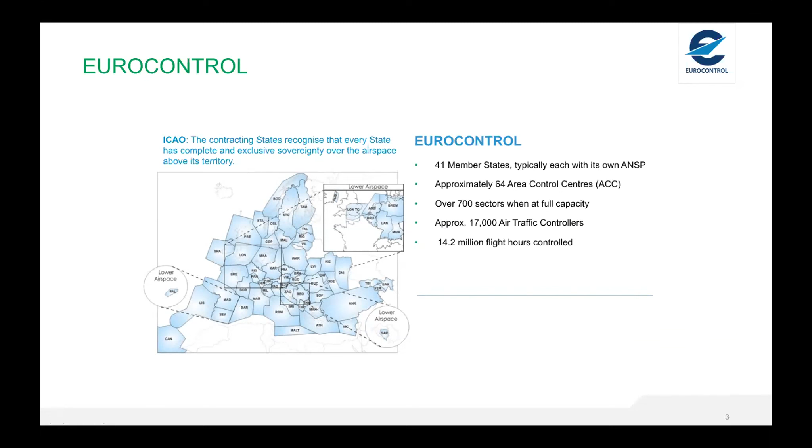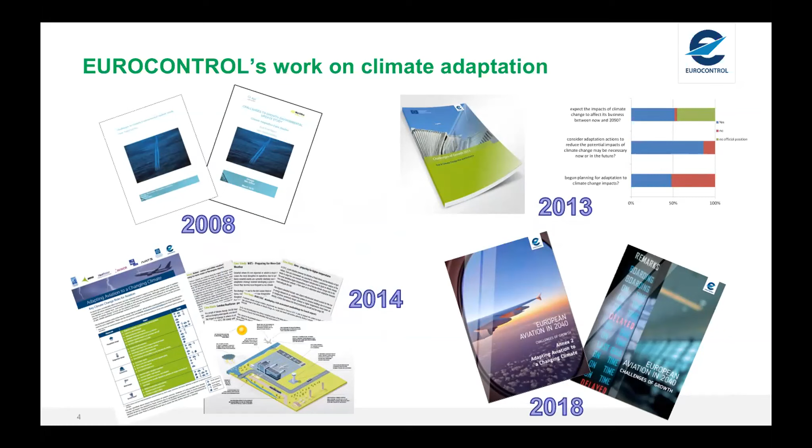It's really a pleasure to be here this afternoon. So I'm going to start by looking at this from the perspective of aviation, or more specifically airports. This is an overview of what I'm going to talk about this afternoon. I'll give a quick introduction into who Eurocontrol are and why we're looking at climate change adaptation, talk about some of the main climate change risks for airports, first thoughts on what the impacts for Ukraine's airports might be, and then climate change risk assessment and adaptation planning. I realize previous presentations have already talked about that quite a bit, so I'll try and put that in more of an aviation context.

Eurocontrol is the European Organisation for the Safety of Air Navigation. We are an intergovernmental organisation, we have 41 member states, and I'm very pleased to say that Ukraine is one of our member states. Our main objective is to support our member states in safe and efficient operation of the pan-European air traffic management network. We do other things too, for example sustainability performance monitoring, and since 2008 we've been looking at climate change adaptation.

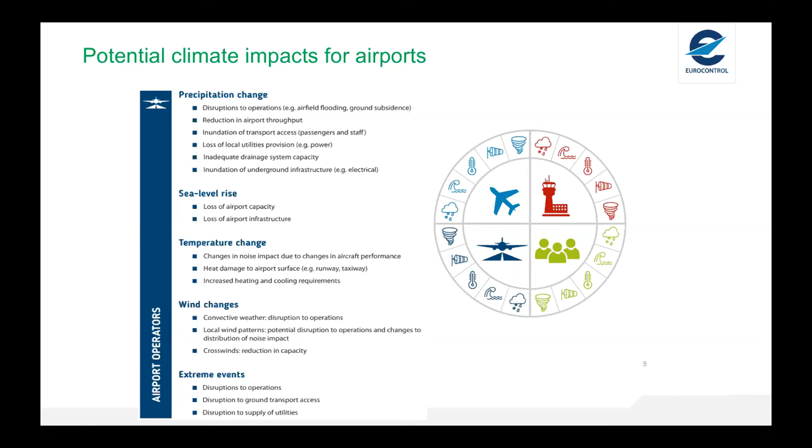We first identified the impacts of climate change as a risk for the aviation sector as part of our 2008 Challenges of Growth work. Since then we've produced a series of studies identifying the potential impacts of climate change for European aviation and looking at how to address those impacts. These can all be downloaded from our website if anybody is interested, or I can send direct links. In June, I'm pleased to tell you we're hoping to publish a new study which will try to quantify the potential impacts of sea level rise, storms, and changes in traffic demand for the European aviation sector.

So these are some of the potential impacts of climate change for airports. It's very important to note that how climate change will affect airports will really vary according to the characteristics, the individual specifics of an airport. That depends on their local circumstances, their geographical location, and what the base climate is that's changing. Impacts can include operational risks, such as increased delay or cancellation of flights because of disruptive or extreme weather and storminess; risks to airport infrastructure, for example flooding, heat damage, or loss of ground transport links; or business risks, such as an increase in cooling demand because of more extreme heat days, or climate-driven changes to demand patterns. So there's really a wide range of risks that can impact airports, but it really will vary according to the airport's individual specifics.

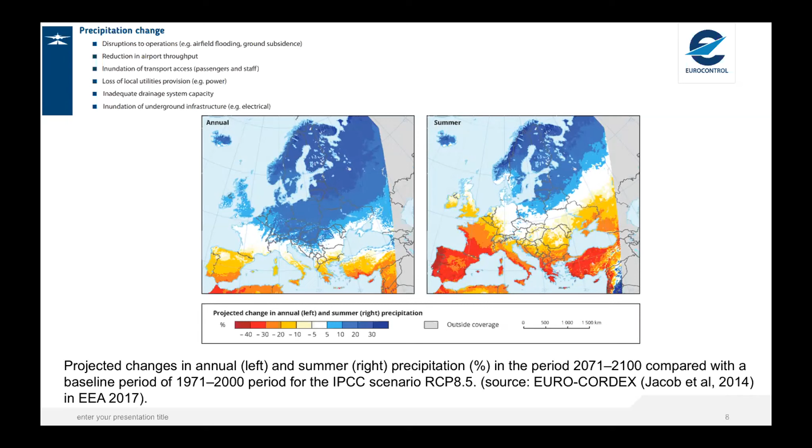So you might have to increase cooling requirements because you're getting higher temperatures. Or something else touched on earlier, you might get more days where the temperature is hovering around 0 degrees, so you've got issues with freeze thaw, and also a lot more freezing rain around those temperatures, which has quite a big impact on operations.

So this is the chart for precipitation. And again, you can see geographically quite big differences here, where you're expecting quite a big increase in precipitation in the north of the country and a decrease in the southeast. Again, just to stress, these are longer term projections, but it gives you an idea of the kind of issues you might want to start thinking about.

For example, is your drainage system capacity going to be big enough to deal with an increase in heavy precipitation? Have you got electrical infrastructure which might be inundated, for example? Or what about your ground transport links? Are they at risk of flooding? And again, this is only a high-level indication. It's really important to do a full climate change risk assessment for each airport, and we will talk about that in a moment.

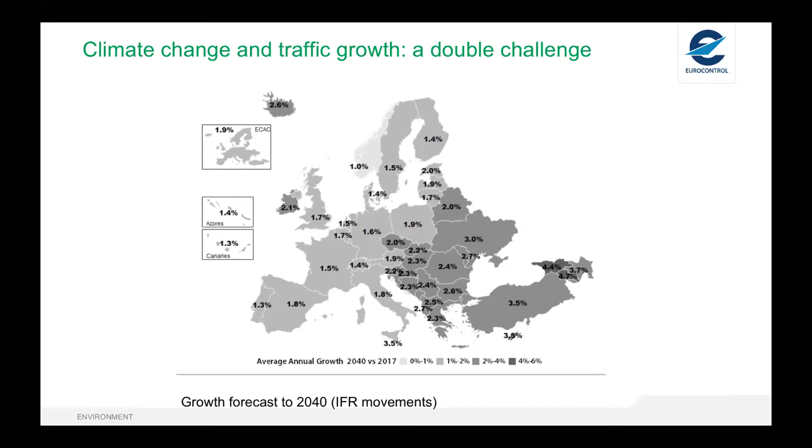But first, just wanted to touch on traffic growth. So we are obviously in very difficult and challenging times at the moment, but after COVID, we do expect traffic growth to pick up again. These are forecasts that were done before COVID, end of 2018, but we do expect to see these kind of growth levels returning. And you can see that Ukraine is expected to have one of the highest annual traffic growth rates in Europe.

And this is relevant to climate adaptation for two reasons. Firstly, when an airport's operating at or close to capacity, the time it takes to recover from a disruption, such as an extreme weather event or intense storm, is much longer. Therefore, any potential increase in weather-related disruption is likely to be further exacerbated. This is something Andrew touched on again - because you're operating close to capacity, you haven't got the redundancy in your system to be able to accommodate the backlog of traffic.

And perhaps secondly, because building climate change resilience whilst managing a significant increase in traffic is really a double challenge. So it's better not to treat the two issues in isolation, but to look at them in parallel. In particular, it's important to note that developing resilience to climate change as part of ongoing operational and infrastructure improvements can be the most efficient and cost-effective way to achieve this. So if you're taking measures to develop an airport to accommodate greater numbers of passengers and flights, climate resilience should be viewed as an integral part of this.

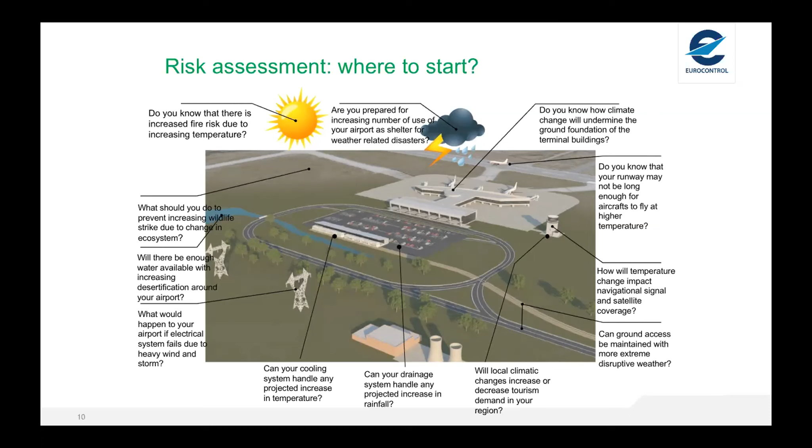Okay, so moving to risk assessment, we have talked about this quite a bit already. I'll try and put a bit more of an aviation context to it. But basically, as the other speakers have said, what you want to know is what could happen, how likely is it to happen, and what is the impact if it does happen.

It's also important to think about who's actually responsible for the assessment and who needs to be involved. So although we're talking about climate change, it's not just an environmental risk, it's an operational, safety, mobility, business risk. So you need to make sure you've got all the relevant parties involved. Perhaps one key point is not to consider the airport in isolation, because there may be some key risks that aren't under the airport's control - for example, ground transport access or utility supply. Can you ensure access in the event of a disruption, and can they be maintained if there are longer term changes such as sea level rise or temperature increase?

So if we've talked about getting local Met data already, we've talked a little bit about building the team, deciding who needs to be involved, making sure you've got the right people from across the airport and externally. And I think another thing that's really important is to get senior leadership commitment.

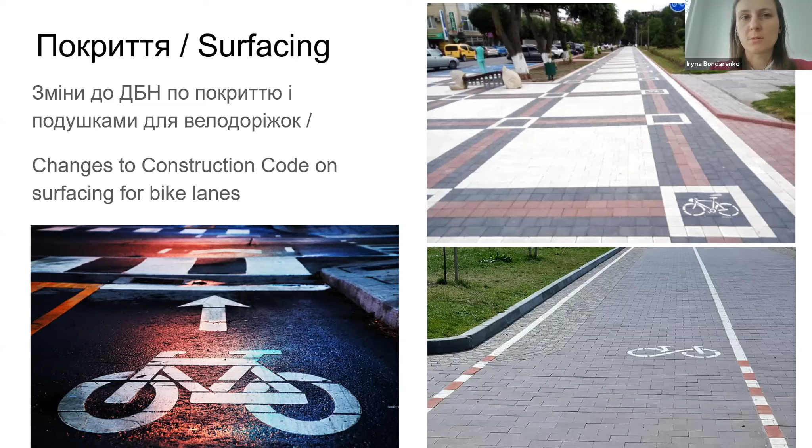Деякі з цих перешкод пов'язані зі змінами клімату, деякі – з недосконалістю наявних державних будівельних норм або інших документів, про які пізніше скаже Богдан.

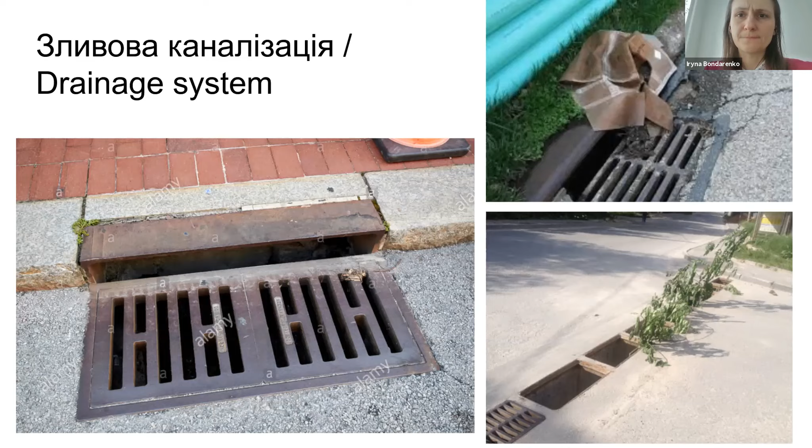Перше, про що я хотіла би наголосити, про що не дуже часто розмірковують, намагаючись зробити величезну кількість велосипедних доріжок, але менше приділяючи уваги, – це покриття цих доріжок. Праворуч ми бачимо кілька слайдів з Кам'янця-Подільського і Тернополя. Дуже популярним є використання плитки для велосипедних доріжок, яка в дощову погоду стає дуже слизькою і небезпечною для використання велосипеда. Це стосується не лише велосипедних доріжок, а й пішохідних тротуарів, і навіть збільшує травматичність при використанні велотранспорту. Також плитка, якщо вона неправильно вкладена, може підніматися і підвищувати небезпеку і для пішоходів, і для велосипедистів.

Це момент, який потрібно враховувати при розробці і врахуванні нинішніх документів, зважаючи на те, що буде більше злив. Якщо ми хочемо пересадити більше людей на велосипеди, необхідно обов'язково враховувати питання якісного покриття для них.

Інший момент – це зливова каналізація. В Україні доволі часто приділяють менше уваги питанню зливової каналізації, що захламляє узбіччя доріг і забирає простір, який міг би бути використаний велосипедистами. Часто також решітки зливової каналізації можуть бути повністю відсутні. Це проблема, яку навіть важко сказати, на якому рівні вирішувати, тому що вона, звісно, вирішується на місцевому рівні. Але якщо є моменти, які можна вирішити на національному рівні, це має бути зроблено. Принаймні, це має бути усвідомлено як важливий аспект розвитку велосипедного транспорту і перешкода в даному випадку.